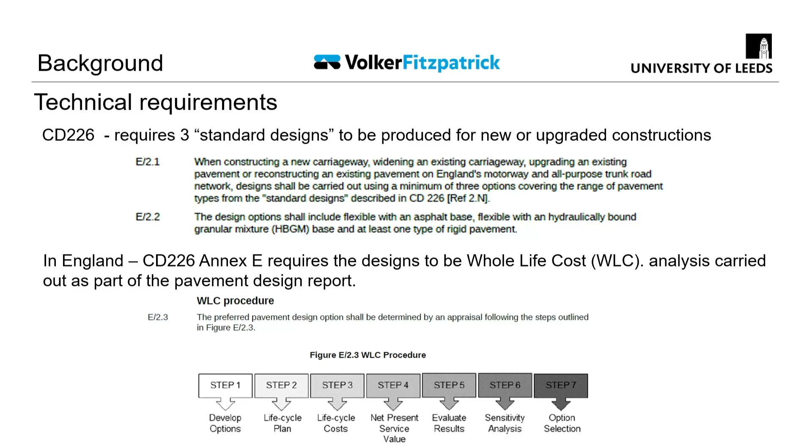CD226 includes different steps where you have to look at the whole life cost. So the steps are displayed on the slide. From developing options, we are looking at the life cycle plan, life cycle cost, and then end up in the option selection through sensitivity analysis.

Regarding the standard designs, I think all of you are familiar with these graphs, included in the design manual of roads and bridges. They present how we can choose the different thicknesses or different base for different solutions, such as flex composite and fully flexible, and for rigid solution, continuously reinforced concrete base and continuously reinforced concrete pavement.

It doesn't show any, as far as I'm concerned - though I might be wrong - roller compacted concrete, and that solution is also not included in the calculator. However, if it's needed, we can implement it as well.

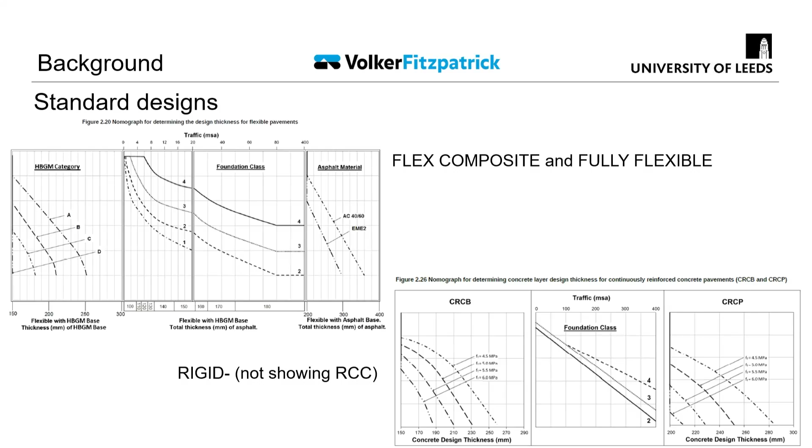When we look at the guideline, there's an example of whole life costs that's required to choose the right solution for our purpose. As I mentioned, currently only cost is included. So there are 3 different options, 3 different costs: discounted costs, residual value, and NPSV options, and then promoted options that we would like to choose for the design and build.

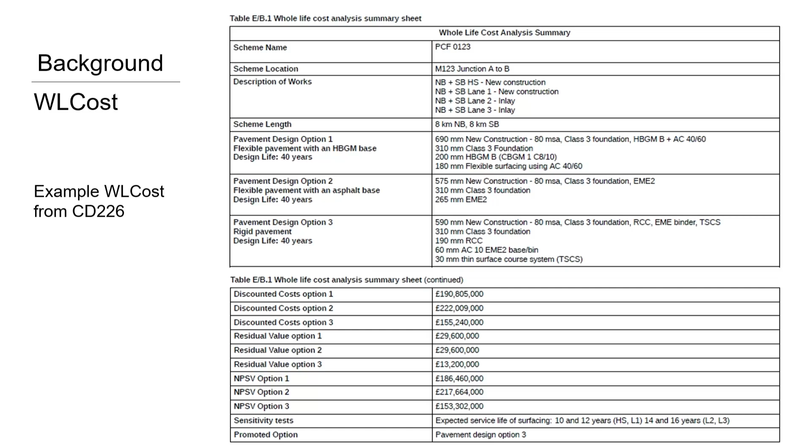Based on that, we decided to increase this part, but also include embodied carbon through the whole life of the pavement.

Previous work by BritPave was done by Dr. Ayers, and this calculator, developed a couple of years ago, included only costs - mainly calculated against initial costs, placement costs, and maintenance cost throughout the life cycle of the pavement.

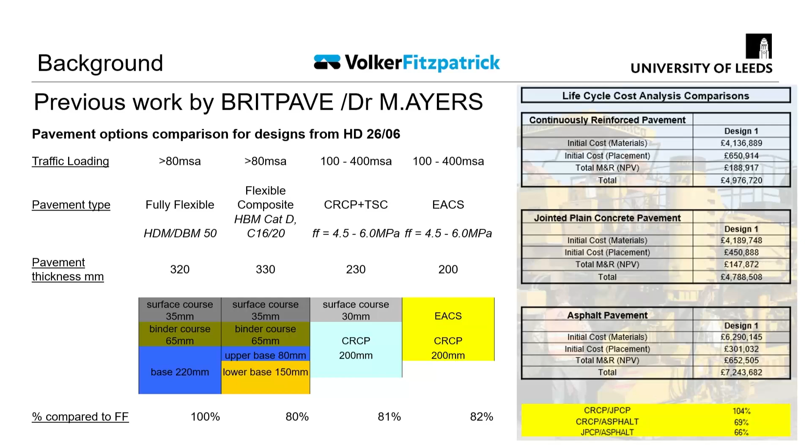But again, because of embodied carbon, and since in general we are going towards net zero carbon by 2050, we decided to include embodied carbon in the construction in this calculator. That's why we started this work in this area.

So building on the previous work, I was asked to redevelop this calculator to include whole life carbon as well as whole life cost. As I said before, it's not a design tool - it's just a decision-making tool according to the design already assumed by the designers. It compares different solutions according to whole life cost and whole life carbon.

I will now present in a couple of seconds what embodied carbon is actually included in this tool.

Of course, we can't forget about the maintenance regime. So we are developing the maintenance regime for the UK, for different pavement solutions, which would also be included.

The idea of the tool is that everything will be transparent, so we can check all the assumptions. All the transparency would be included in this tool. There are no hidden cells, and all the values - either cost or carbon - would be available to the user.

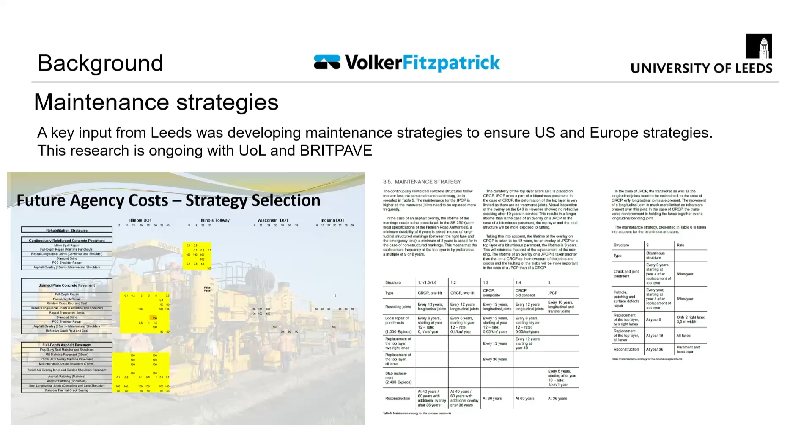We wanted it to be very user-friendly. The input should be very easy to do by the consultant or engineers - structural engineers or civil engineers - based on very simple assumptions.

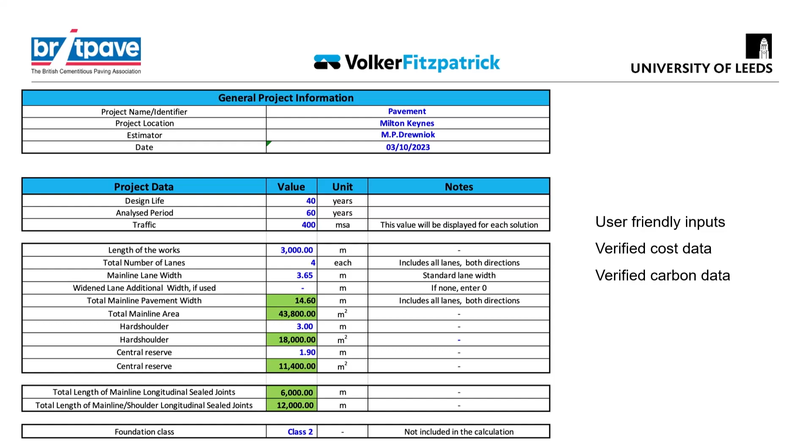The cost data and carbon data is going to be verified later on, but it will be transparent, so everyone can look at what data were picked for the analysis.

But let's stop a little bit and think about why this is important. One reason is that we have a design manual for roads and bridges that requires cost - but what about carbon? So just a few statistics that I'd like to show you.

Just to visualize ourselves why we do that - why we as academia, in the UK, and globally are doing this - approximately 6% of energy-related carbon emissions are related to non-building construction, meaning infrastructure including roads, bridges, tunnels, and those kinds of things.

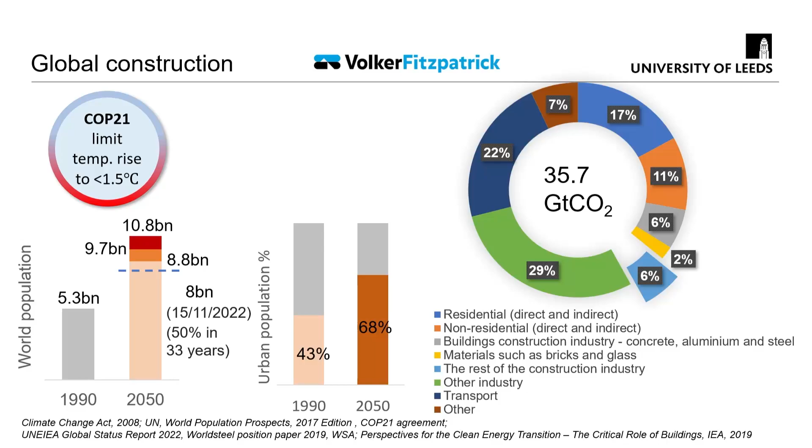As I mentioned, because of the increase of the population, we are going to increase dramatically the floor space. The projection says that we will double floor area of buildings by 2060 compared to 2017, mainly in China,

Africa, and Middle East. However, I just pointed out on the left-hand side, I recalculated to 2050, because that's our actual goal in the UK. We are going to increase the floor area by 25%, by a quarter.

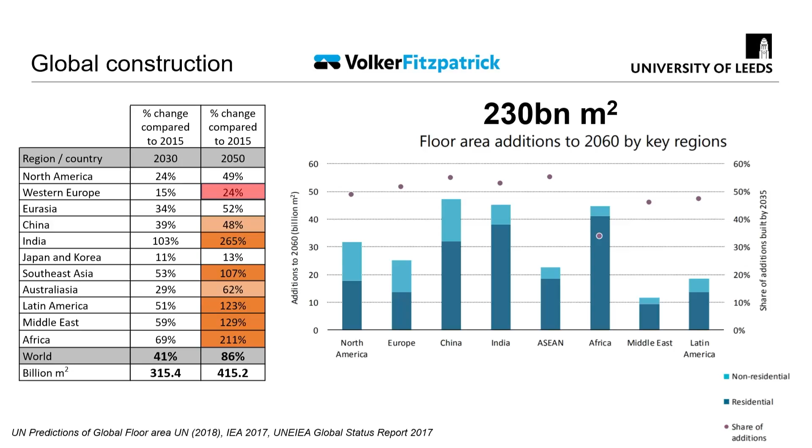So because we need to increase the floor area, we need to deliver the infrastructure, so also roads. Yeah, to visualize it, what we are dealing with.

We are dealing with how we can describe doubling the floor space, floor area of buildings by 2060. It's just like adding the equivalent of Paris to the planet every single week up to 2060, or adding the floor area of Japan to the planet every single year by 2060.

So we don't see it today in the UK. Three weeks ago, I returned from China, from Chengdu. It's enormous, just an enormous construction site there. How fast they are building the buildings and infrastructure is just madness.

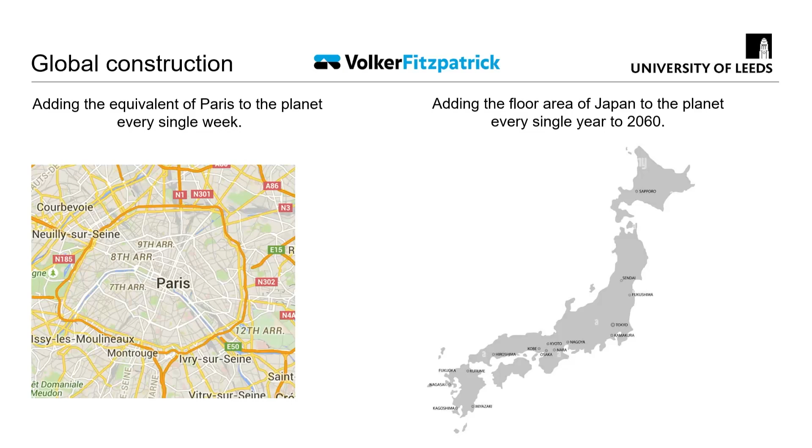So we are not seeing this here, but we need to be the leader of lowering the carbon emissions and lowering the cost in the construction, that we can then pass to the other countries that don't have this kind of know-how.

If we look at the UK, approximately 6% of the greenhouse gas emissions are from construction, and you can see here on this graph, approximately 18% of those emissions out of that 6% are from infrastructure. 60% of those 18% of that 6% are from materials that are used in infrastructure.

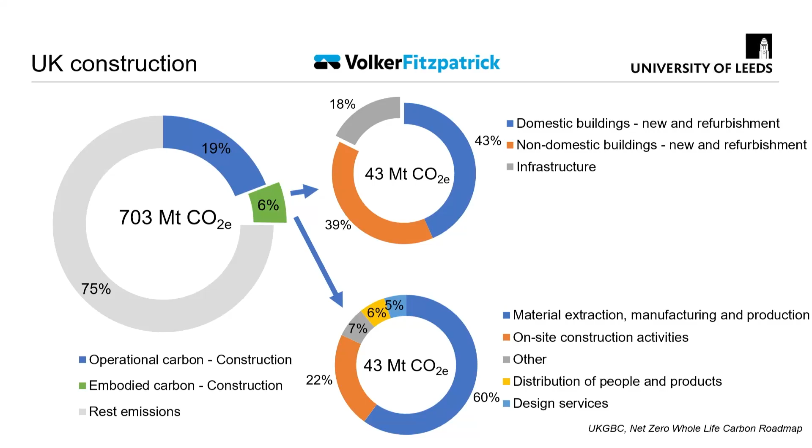In the next slide, I will show you where the material goes in the UK construction based on our recent analysis.

On the left-hand side here, you can see how much material by mass is used in UK construction, or was used in UK construction in 2018. That excludes aggregates that are used, for example, for foundations, but it includes the aggregates in concrete and asphalt and other works. So approximately 50 million tons of the materials listed on the left-hand side goes actually to the infrastructure in the UK, to infrastructure projects in the UK.

On the right-hand side, you can see that approximately 5 million tons of greenhouse gas emissions are actually in the infrastructure area. So it's quite significant.

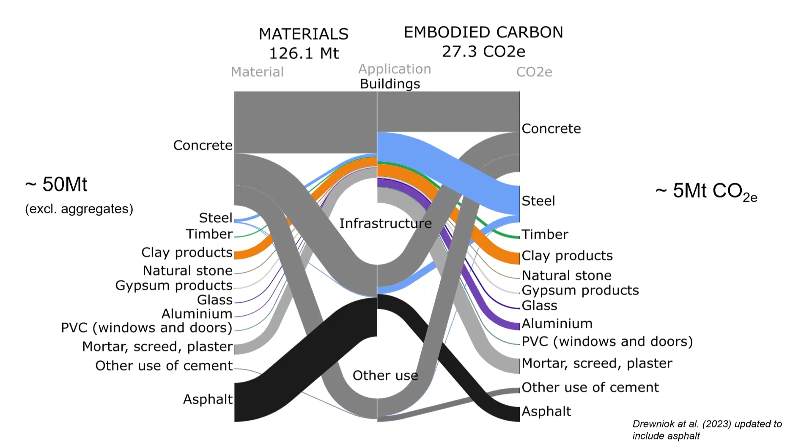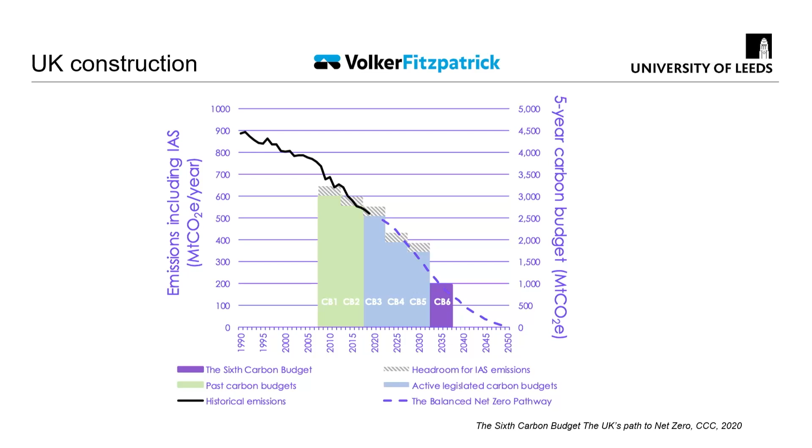And we can't forget about one thing, as I mentioned, by 2050 we need to get to net zero carbon. And for now, we don't have the magical innovations to offset the carbon emissions or greenhouse gas emissions. We need to reduce by using as little as possible, with as little carbon-intensive material, and make our decisions very wisely.

Now I would like to talk a little bit about embodied carbon. I think you know about some of these things, I hope, but I think it will be excellent to introduce this kind of topic as well.

So at the very beginning, when I started my presentation, I mentioned the energy-related carbon dioxide emissions. They are not the same, not the same as the global warming potential, which is...

greenhouse gas emissions. So in the UK, and in all calculations and in the tool that we are developing, we are looking not at carbon dioxide emissions, but at the greenhouse gas emissions that include CO2. The share of carbon dioxide emissions within the greenhouse gas emissions is approximately 70%.

So we need to bear in mind that not all - so if we are using some units, CO2 equivalent is actually the global warming potential that includes carbon dioxide emissions. And of course, we can calculate what is the share of different greenhouse gases within those greenhouse gas emissions, but it's...

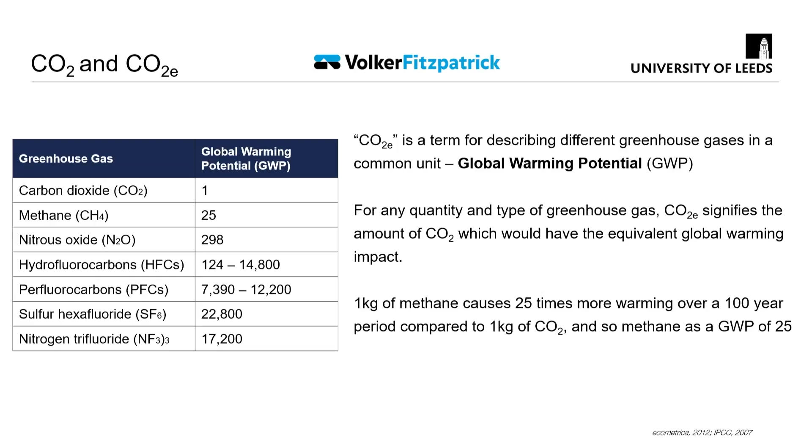we use in this tool the greenhouse gas emissions rather than CO2, because it's more relevant for us, because we need to become net zero carbon, which means net zero greenhouse gas emissions by 2050 in the UK.

I'm sure that you are familiar with the carbon management in buildings and infrastructure standard that was published in 2016, that was revised this year, or last year and this year - it was published this year.

So what we are in control with in the buildings and infrastructure, we can control the capital emissions that could be called embodied carbon, and that is mainly before the use of the buildings or infrastructure. During the use, we are looking at the capital carbon, operational carbon, and user emissions. And after the use, we are in control with capital emissions. This standard doesn't specify whether those emissions are embodied or where the embodied emissions lies.

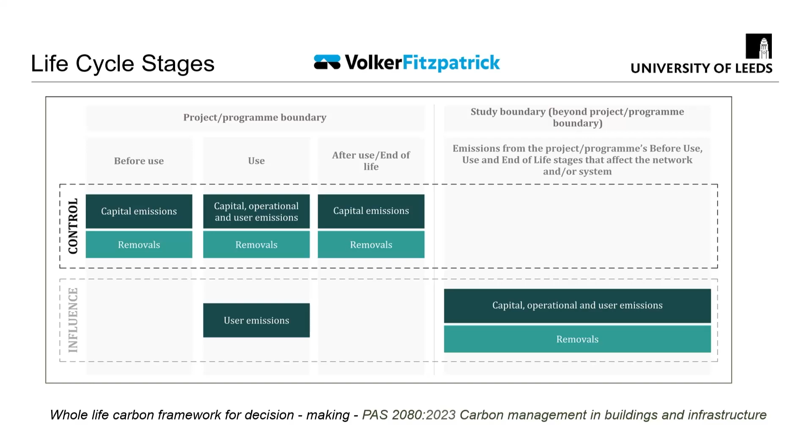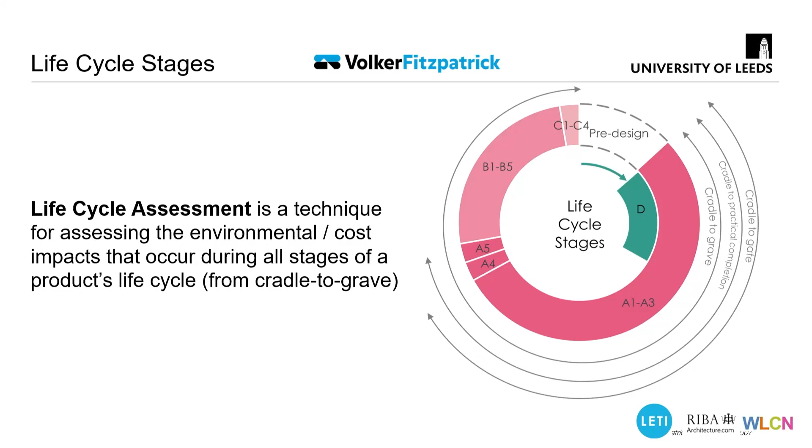So in the next slide, I wanted to highlight one thought about the life cycle assessment. We can calculate the carbon emissions, embodied carbon emissions, as well as operational carbon emissions across the life cycle. So we have standards that allow us to quantify the different emissions across the different stages of life. And we are using life cycle assessment, which is the technique that allows us to assess either cost, carbon, or even social aspect across the life cycle. It's created and built in a modular way.

So on the left-hand side here, you can see the upfront carbon, which can also be described according to the standard as capital carbon. But of course, depending on different definitions and different boundaries, it's very important for us as assessors doing these calculations to be very specific in definitions, because capital carbon can also relate to the embodied carbon across the life cycle. So in any work I'm doing, it's very important to define what actually embodied carbon means to us.

So embodied carbon, according to the standards listed on the bottom, we have standards that describe how we can calculate it. Before the change PAS 2080, which is now more recent, in one of the documents we published two years ago, January 2023, we defined embodied carbon and split it into upfront carbon, which is cradle to practical completion. That includes cradle to gate, then transportation of the materials to the construction site, and then the construction and processes in the construction. And of course, embodied carbon includes all the emissions related to the materials over the life of the structure, building, infrastructure.

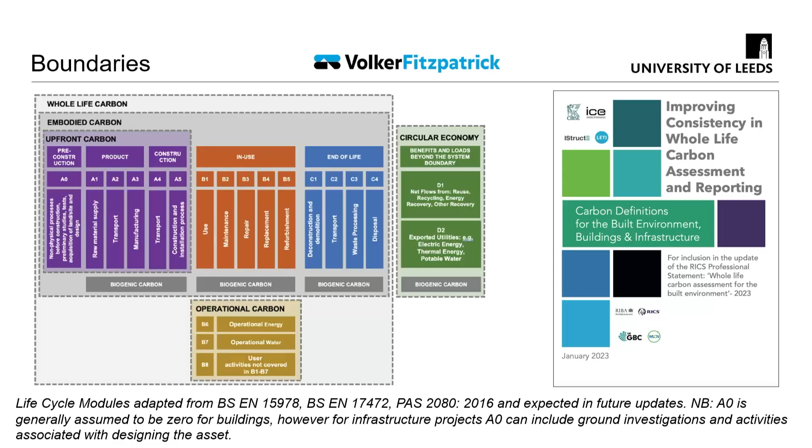So as I mentioned earlier, it's very important to define what we understand by embodied carbon. And the PAS 2080 also presents one very good graph, which is the carbon reduction hierarchy. We know that if we don't build, we are not spending the carbon — there is no carbon cost or no capital cost. But of course, we cannot avoid some of the structures with increasing population. We need to deliver buildings, we need to deliver infrastructure projects. So we cannot afford not to build.

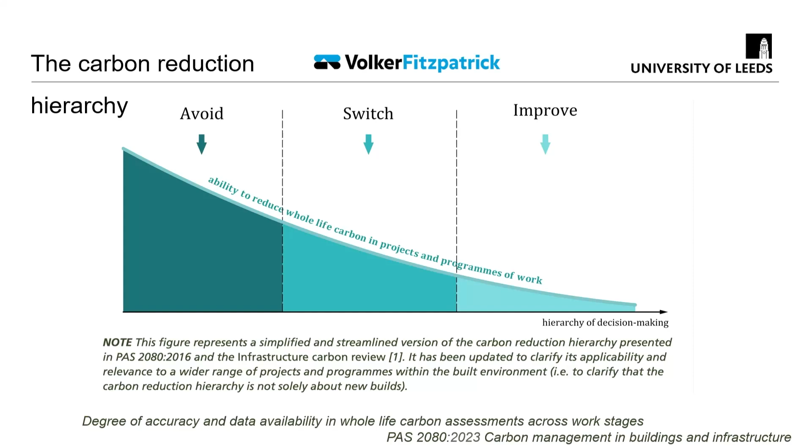So in this kind of area, the savings could be the highest. But we are looking in our world today, and in our calculator, we are looking at switching to different solutions. So what solutions might be the lowest carbon or lowest cost? And then if we find the lowest cost or lowest carbon solution, how can we decrease the carbon or cost even more? I think that is a very good representation of where the savings can be made, both from the cost and the carbon, and of course, the social aspect.

So, four slides about the road pavement whole life cost and whole life carbon calculator, the Britpave tool. We are using upfront carbon as a main metric, but of course we are including maintenance, repairs, replacement, and refurbishment — all the regime that needs to be done during the lifetime of the pavement, whether it's 40 years, 60 years, 100 years. So we can and we are going to implement this kind of regime within the tool. Of course, we are including end of life, but only for the materials that arise from the maintenance, refurbishment, or replacement.

We are not including the end of life of road or pavement. We can do that later on, but for now, I think it's much more important for us to implement what is actually needed to make a decision today, for the next 50 to 60 years. However, it will be very important to include this from the circular economy and lowering the future carbon perspective.

This tool doesn't include yet, maybe in the future, the construction wastes. The material that is assigned to the tool is only the design material. We are not counting for the material that is wasted, so over-ordering—there is no information about over-ordering. If we have data for that, we can in a very quick way include this, but there is no information about how much concrete or tarmac or asphalt is wasted on construction sites. I don't know it. If we know the data, we can implement it very successfully and very quickly.

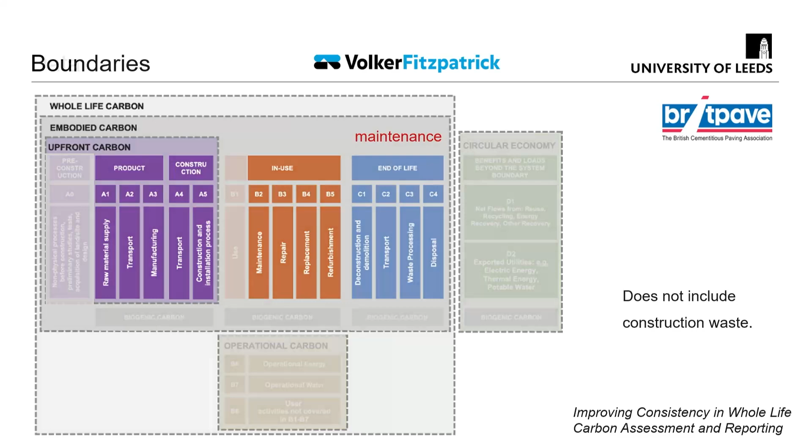So the tool will include the material cost. It will be transparent. The construction cost as well, so not only material costs, but how much it actually costs to place the concrete, to place the pavement, to place the asphalt.

Embodied carbon: the tool currently lists approximately 90 different asphalt mixes, 40 different concrete mixes, and the data for embodied carbon, so all the modules from A1 to A5, cradle to gate, cradle to practical completion, use phase, and then end of life, are either from environmental product declarations that are publicly available, or available databases such as ICE 3 or ICE 2 developed by the University of Bath, or available literature. So that's some kind of mix of the data that we found and included. Of course, all the sources are already included and embedded in the tool, so everyone can just look at where the data comes from.

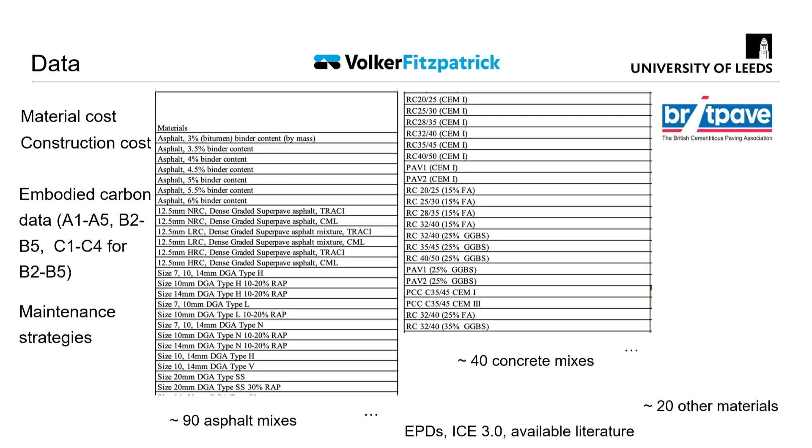And now we are at the stage of specifying the maintenance strategies, and we are working on that—what should be done over the period of the lifetime of the pavement, according to the different maintenance works.

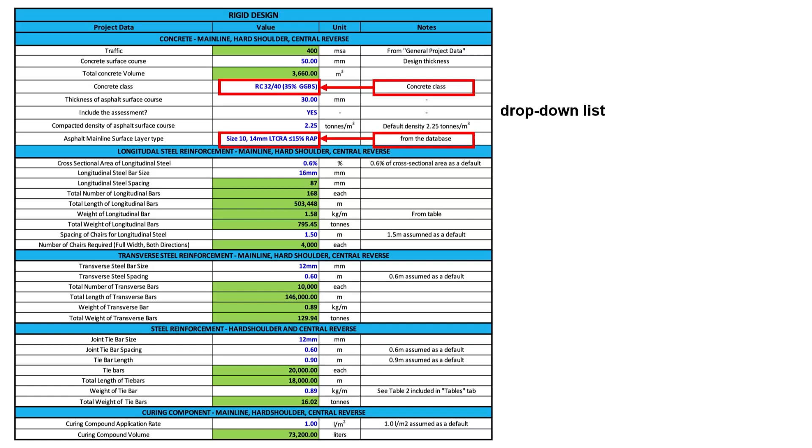So that shows a slide of what the input data looks like. For example, for the rigid design, all the green cells are fixed—you can't change anything. But you can change the cells with blue fonts, and most of the cells have a drop-down list that you can choose the material from. For example, for rigid design, you can specify the concrete, you can specify the asphalt, you can specify the cross-sectional area of the reinforcement—it's already embedded in the tool.

For example, for a flexible composite design, because of the different structure, you can also have different types of material that you could use as a designer to compare one solution against another. And decisions on the use of material already take into consideration embodied carbon and cost, so that automatically gives you a final result.

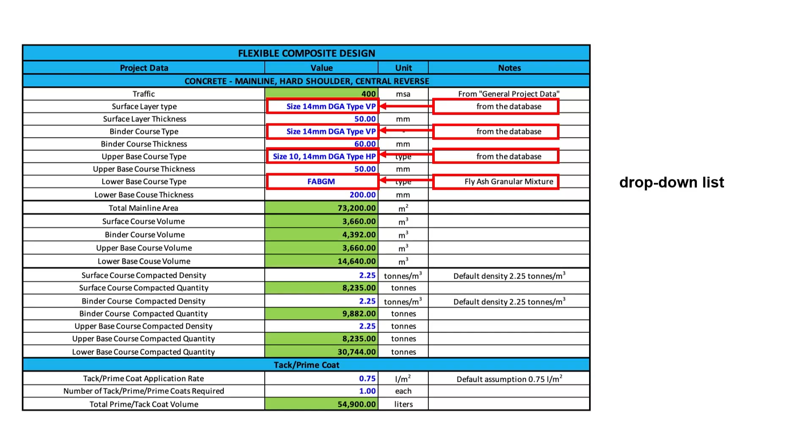For fully flexible design, exactly the same. So the user of the tool just has to go through three different, very simple Excel spreadsheet tables, and pick the assumption that he or she made, according to which the designer designed the pavement.

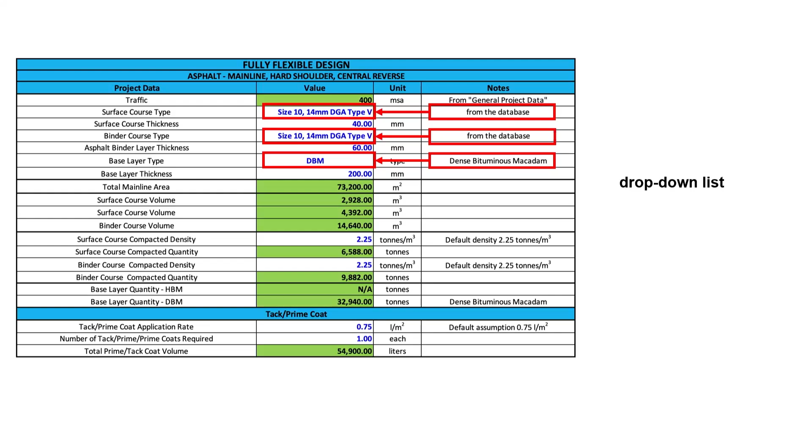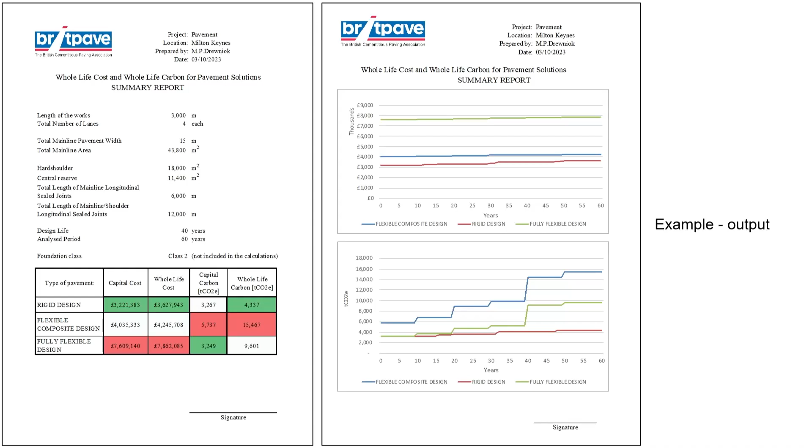And as I said and previously showed, that is the final product, the final results. So that shows the different—on the left-hand side, the assumptions, the cost, the carbon, both capital carbon or upfront carbon, and whole life carbon for the solution we are considering. And on the right-hand side, you can see the cost of the different solutions, as well as whole life carbon for different solutions, including the maintenance regime and including the end of life of the material that needs to be replaced, removed, or refurbished.

I think that is the end of the presentation, and we are now at the stage, as I mentioned, of developing the maintenance regimes.